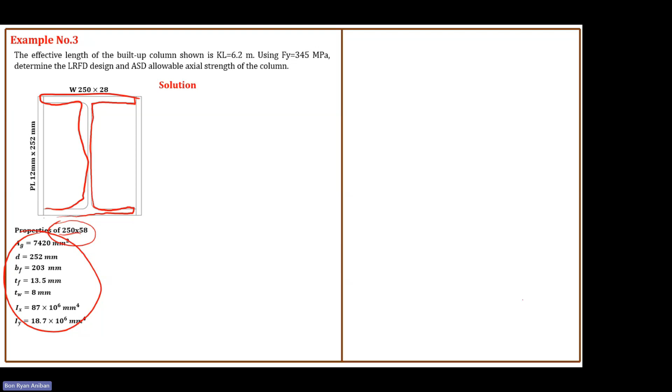You can look up the necessary properties on the database. Now, since this W section is weak on the y-axis, you can actually see that. Look at the moment of inertia about the y-axis. It is only 18.7, meaning you can justify that this is weaker than the x-axis.

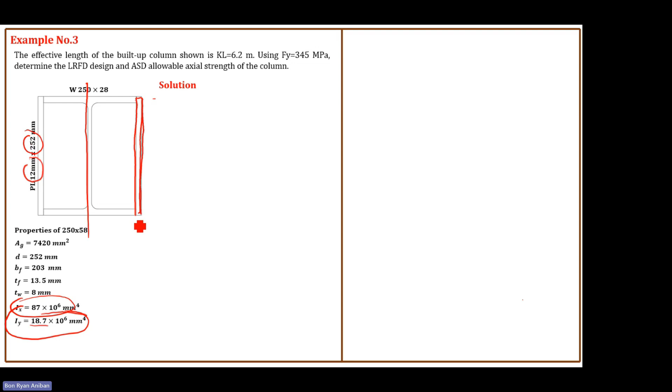So that's why we provide an additional member, which are plates. We have PL 12mm by 252. 12mm is the thickness, and then 252 is the total length. This should be 252 because that's the depth of our W section.

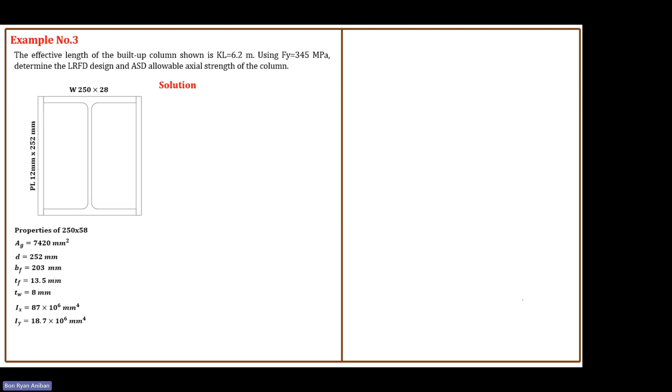Since this is a built-up section, we have to resolve the new material properties of the combined W section and the plate. We combine their area of cross, and then all necessary material properties.

So what are those material properties? Of course, the area of cross. We just add them. So this W section, 250 by 28, the area of cross is...

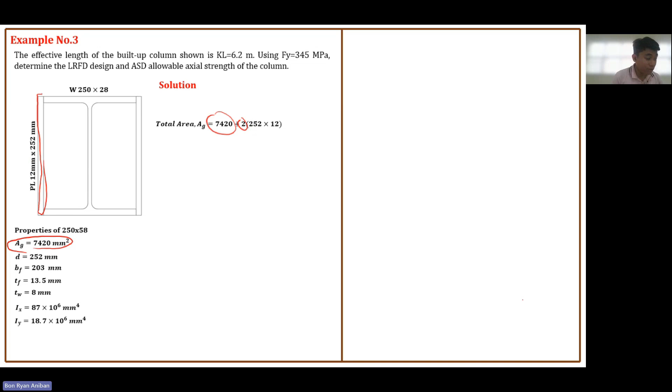7420 plus the two areas of this plate. So 2 times 252 times 12. So the new area of cross will be 13,468 millimeters squared. Next, what else?

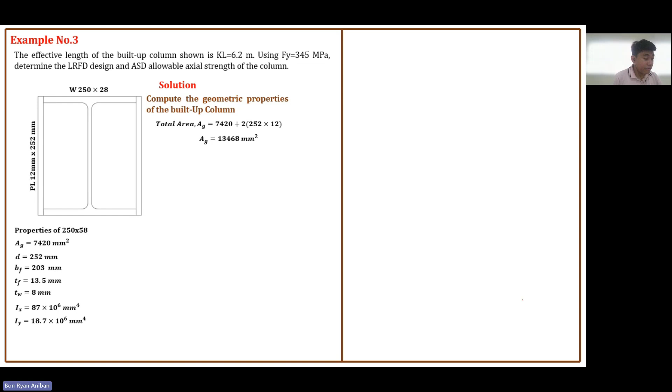The moment of inertia will now differ from the previous moment of inertia since we added some elements. So what will be the new moment of inertia? Let's start with the x-axis. So this is your x-axis, and you already have the moment of inertia of the W section.

Technically, you're just going to add the moment of inertia of this rectangular shape. Since the centroid of that rectangular shape coincides with the x-axis, the moment of inertia, this is your B, that is a rectangle, B H cubed over 12. So that is times 2. We have 87, that is the moment of inertia of this W section, plus BH cubed over 12.

It should be BH cubed over 12. So B is 12, H is 252 cubed over 12. Let's calculate the value. So we have 87 times 10 to the 6, plus 2 times 12 times 252 cubed over 12.

BH cubed over 12, that's just a rectangle. So the answer here is 119.006 times 10 to the 6. So it's correct, I was just short by 1. So that is the moment of inertia about the x-axis.

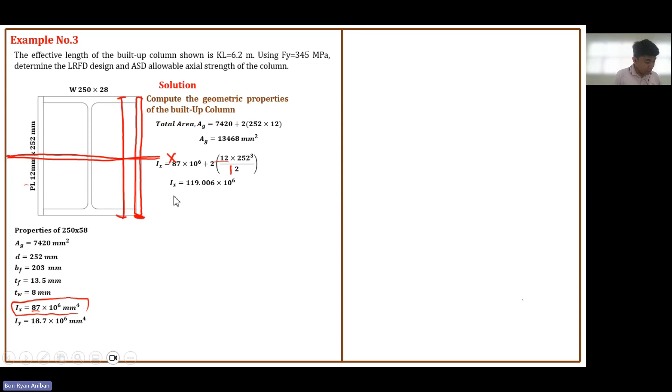Now let's talk about the radius of gyration. This is important too, because later on, in solving the capacity of a compression member, we need KL over R. So, radius of gyration.

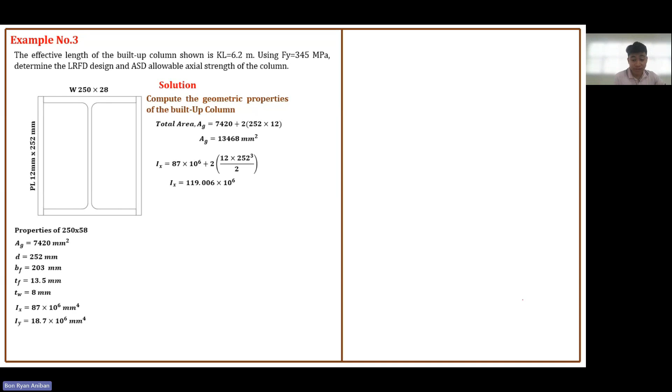The formula for the radius of gyration is just the square root of Ix over the area of the gross cross-section. So we have the Ix divided by the new area of the gross. This is millimeter to the 4, this is moment of inertia, millimeter to the 4.

Then you have the denominator in millimeter squared. So the unit for this Rx is just millimeter. So 94.001 millimeters. Next is the moment of inertia about the y-axis.

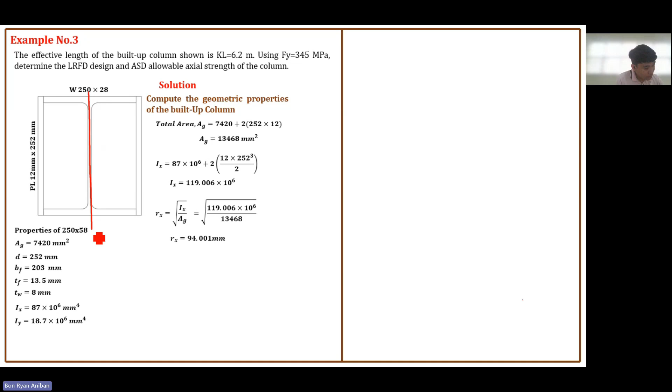So this is your y-axis. As you can see, this is your W section, and its centroid already coincides with the centroid. This will be the overall centroid of our new members. Now, this will be the overall centroid.

As you can see, the centroid of the W section, which we already got its moment of inertia from the database, already coincides with the new centroid about the y-axis. Therefore, that's it, we just add it. That is the moment of inertia of this rectangular section.

However, its centroid does not coincide with our overall centroid. Therefore, you have to perform the transfer formula. There is a distance between the centroid of this one to this one. So if you will recall from your statics of rigid bodies, you can solve the moment of inertia about the neutral axis by Iy plus the area of that member, then A times D squared.

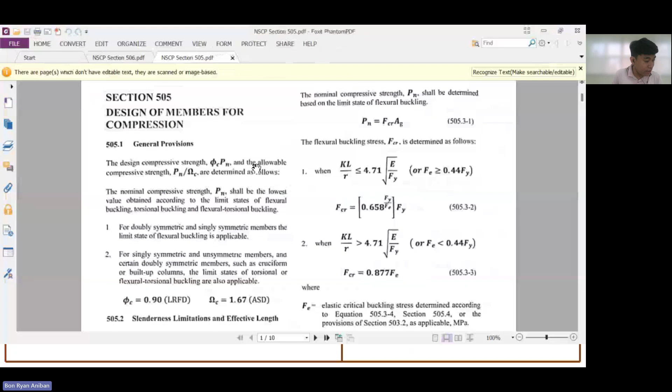So for built-up members, we can actually use this, no? We can just assume, because if we're going to look at the stiffened and unstiffened element, class, supposedly this is an unstiffened element. But since we added this here, it becomes stiffened, so we cannot check its compactness or the width to thickness ratio.

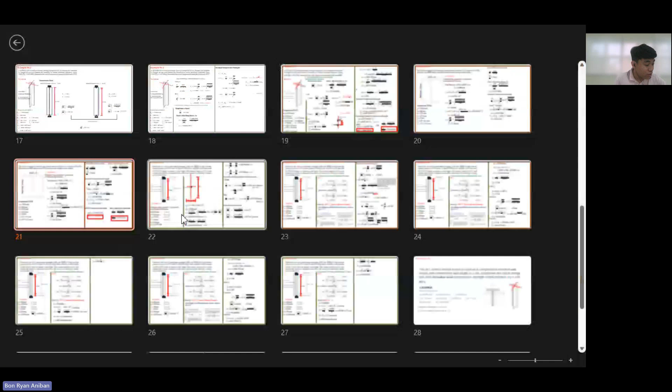So if we recall, we have to check the slenderness of each element - whether it's slender, non-slender, compact, or non-compact. That was our solution last time. So before you proceed, check if it's compact, non-compact, slender, or unslender - that was our solution before.

Next, we check the flange and the web of that element to see if they're slender. So check the limiting width to thickness ratio, as presented here in the NSCP page, this one. However, for the built-up section, we cannot check its compactness.

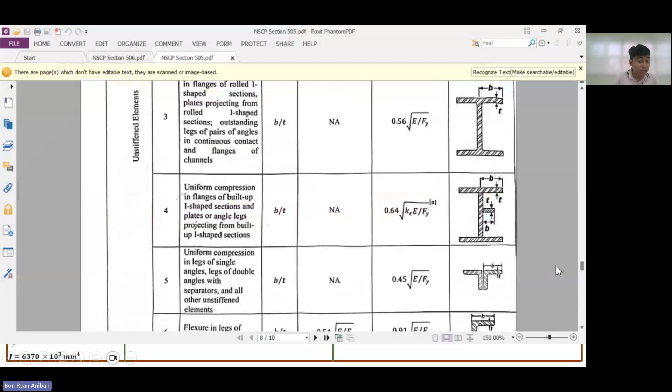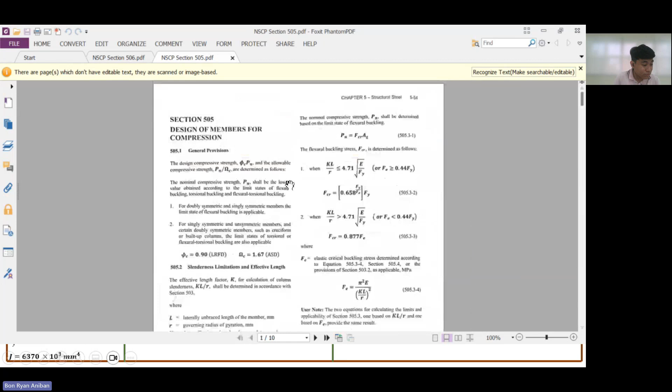So therefore, we can just assume that all elements are compact. So since both are compact elements, we can just proceed - no slender elements. So we can just proceed with this 505.3. Since there are no slender elements, for a built-up class, we just assume and proceed without slender elements.

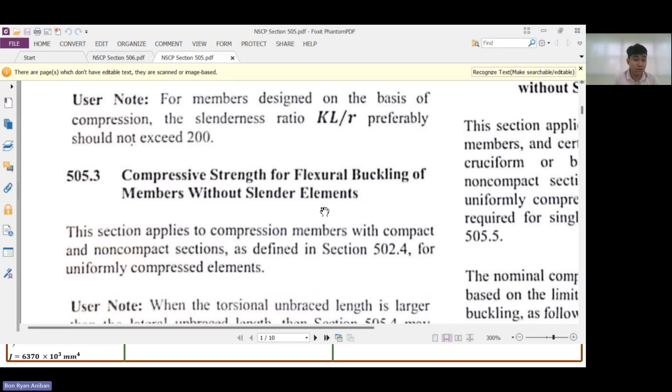When it's a standard section from the AISC standards or database, you have to check if it is slender or non-slender elements. But for built-up, it's automatic - especially when there are no more unstiffened elements, everything is covered, everything is stiff. So you can just proceed with the compact section, without slender elements.

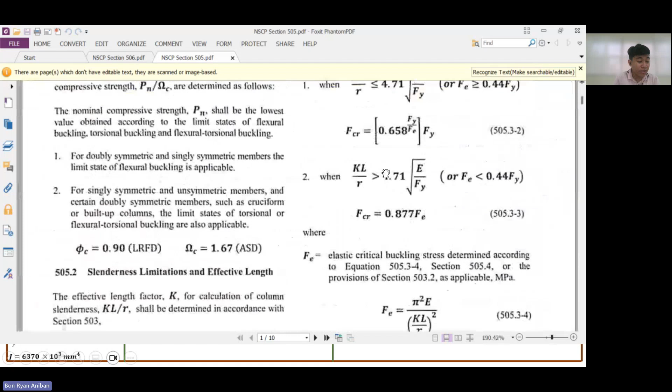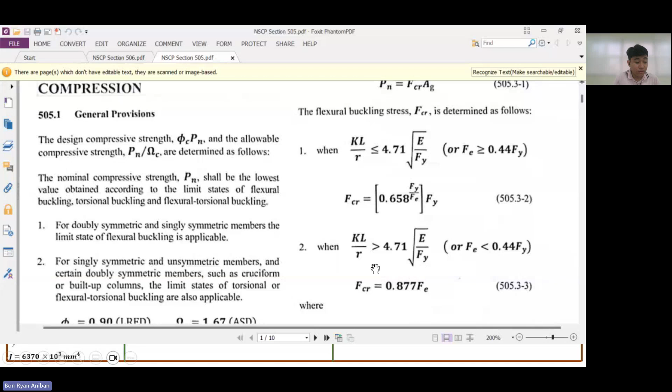So technically, to get the compressive force, we're just using this formula - it's either of the two. We have to compare the critical slenderness ratio to the value of 4.71 square root of E over Fy. Whichever governs here, that will be your FCR. Then to compute the nominal capacity, FCR times the gross area.

So now we can compute the nominal capacity of this built-up section. We'll be using the provision from 505.3. So we compare the KL over R to 4.71 square root of E over Fy.

Solving this value, we already have this. The Fy we're using, class, is A50, 345 megapascal. It wasn't mentioned in the problem, but it should be A50 - 345 megapascal is our Fy. So this one is 113.403.

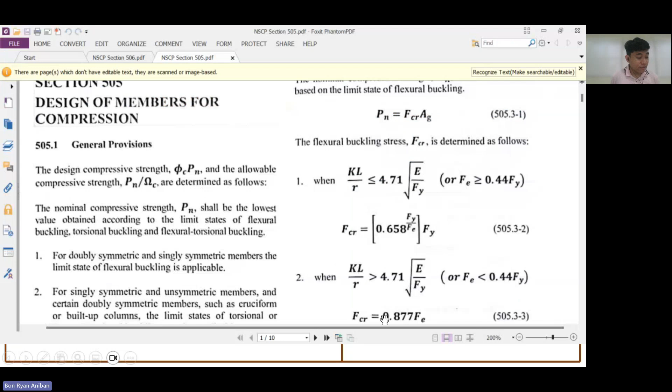So the critical slenderness ratio is only 76.41, and that is less than... okay, so it should be 345 megapascal - that's given. Since KL over R is less than this 4.71 square root of E over Fy, we're going to use this formula instead of the other one - 0.658 instead of 0.877, since you'd only use that other one if your KL over R is greater than 4.71.

Okay, let's substitute. So the value of FCR is 225 - check it yourselves if this value is correct. I double-checked it myself. FE used here is 338.06, and Fy is 345 megapascal. So the FCR is 225.068 megapascal. Now we calculate the Pn, the nominal capacity, the actual strength.

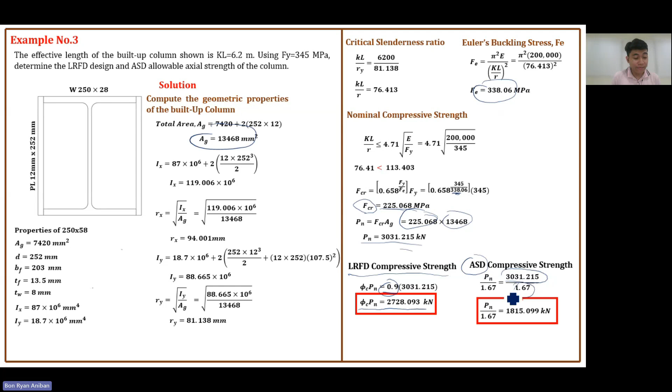So Pn is equal to FCR times the new gross area. So the Pn, the nominal strength, is 3,031. But we want to calculate the LRFD and the ASD. So again, to calculate the LRFD compressive strength, you just multiply the Pn by 0.9. For ASD, you divide the Pn by the safety factor 1.67. So these are your answers for LRFD and ASD.